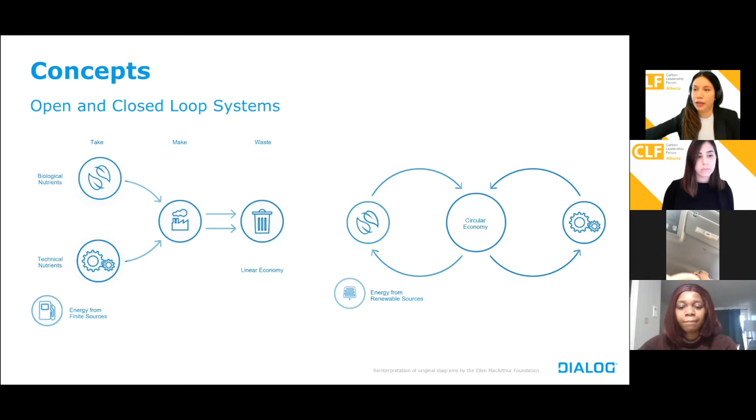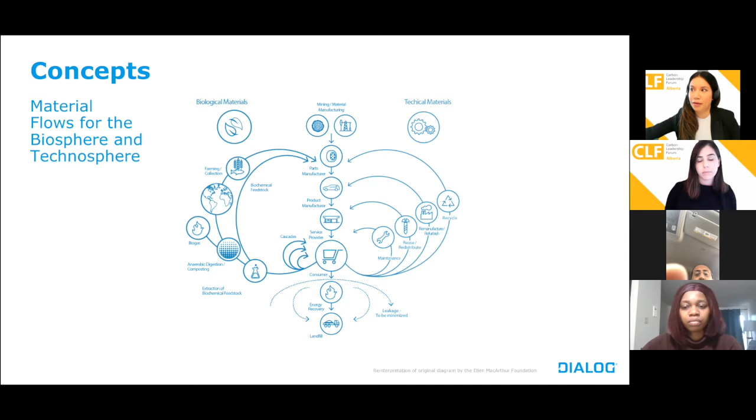This diagram makes a distinction between the biological or natural materials and the technical or man-made materials, and it describes a series of loops and cascades of materials between stakeholders in this resource cycle. Both biological and technical cycles together represent the core elements of a circular economy.

The biological cycle consists of materials that after end of use can be biodegradable without polluting nature, such as cross-laminated timber. The technical cycle consists of materials that after end of use can be separated and reused into new generations of industrial products without loss of quality. An example of this would be structural steel.

Circularity aims to intentionally design systems that separate these two kinds of materials and cycle them into new generations of industrial products without degrading their quality. You'll notice in the diagram that there are shorter and shorter loops. These are meant to describe the concept of upcycling, which aims to shorten the cycles between material reuse. The shorter the cycle, the more energy is retained.

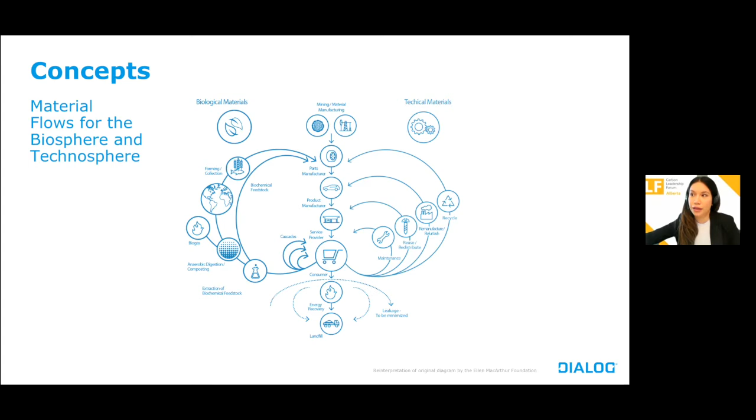Depending on a project typology, the design service life of structural elements can sometimes be only 5 to 10 years. Through circular design, the intent is for the structure to be a minimum 50 to 100 years, thus prioritizing the long-term durability of elements to achieve an extended design service life.

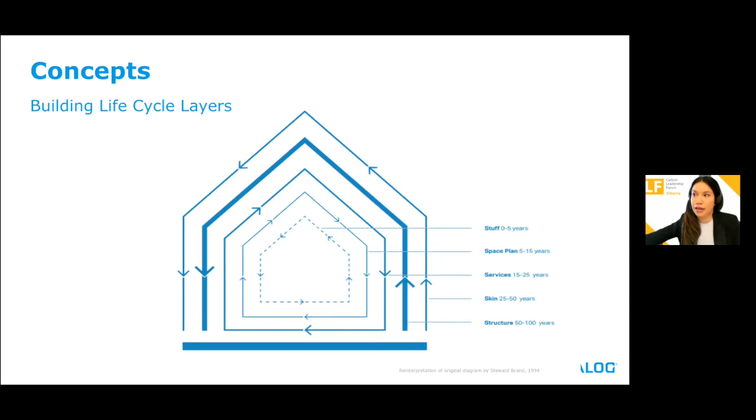Now I will pass it on to Stephanie Dalo.

Thank you. So a strategy that can be implemented to achieve circularity in your projects is designing for disassembly. You can think of it kind of like getting the most bang for your buck. When you design for disassembly, it allows for systematic and selective disassembly at the end of life, making deconstruction more feasible. This in turn can allow for salvaging of materials and therefore diverting construction and demolition waste from waste streams.

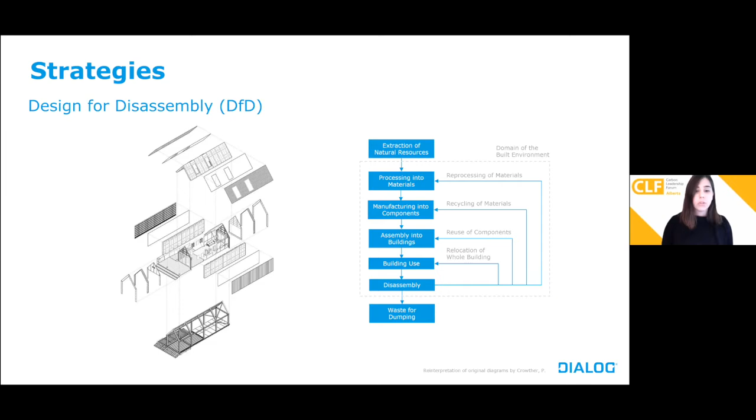This also makes it so that the carbon that was originally emitted through the extraction, processing, and manufacturing phases remains stored in the material or building components that can be reused.

When designing for circularity, it is important to source materials and products that have lower environmental impacts. An environmental product declaration, or EPD, allows the project team to better understand and measure the material's global warming potential and its contribution towards the environmental impact categories. Typically, designers are mainly concerned with ordering products that have EPDs so that they can gain LEED points.

However, EPDs can also offer both architecture firms and the clients a benchmark to define the environmental performance of their portfolio, and these portfolios can go on to be shown to future stakeholders. If EPDs are used more often, it will help provide more transparency in building product markets and elevate the awareness of the environmental impact of products. Stephanie will go into EPDs in more detail later on in the presentation.

Another strategy to consider is material monitoring. Some firms are looking into this concept by defining something called material passports, which aim to connect the physical materials with the digital data. Effective recovery and reuse of components, products, or materials in buildings requires that the right information is easily accessible. Material passports act as sets of data describing defined characteristics of materials in products that give them value for recovery and reuse.

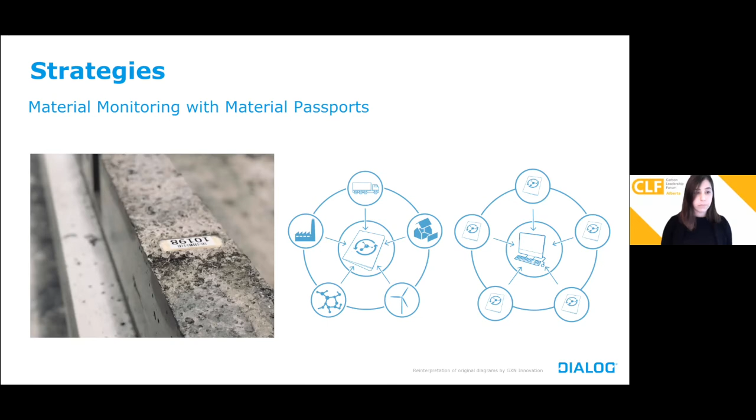There are examples of this kind of technology being used today. Tremco and the Hong Kong Housing Authority have been using RFID chips for better tracking of their products. Tremco is using RFID chips in their roofing to scan to find out product info and if there is an EPD, maintenance, etc. on the roof.

And the Hong Kong Housing Authority is also using RFID chips in their building elements to enable real-time visibility of precast building components that are connected to the BIM and transportation logistics.

On the other hand, as shown on the right there, there's the Superuse Studios Harvest Map, which is an open source platform that tracks leftover industrial and deconstruction materials. The idea is that these materials enter a platform that acts as a material bank. It has been used in the Netherlands and in Italy, and there is a growing interest in North America about this as well.

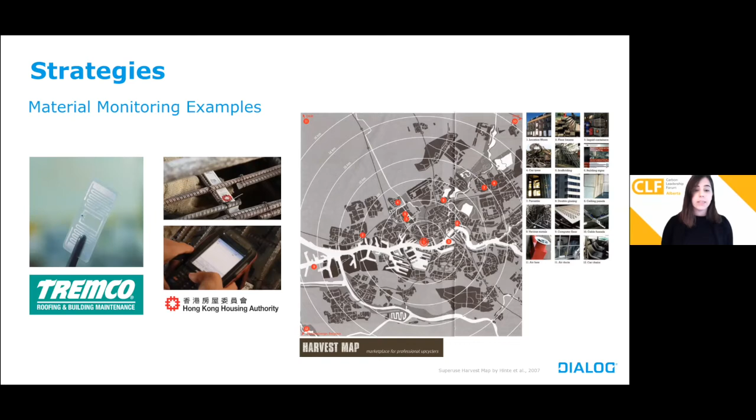We're not going to focus too much on material passports today, but the idea is that this approach can better enable disassembly strategies and the use of EPDs. And the idea also extends past involving disassembly and material screening information to suggest that we can share materials and products across projects. This concept has been referred to as buildings as material banks, since it suggests that buildings can essentially lease materials and trade them between projects.

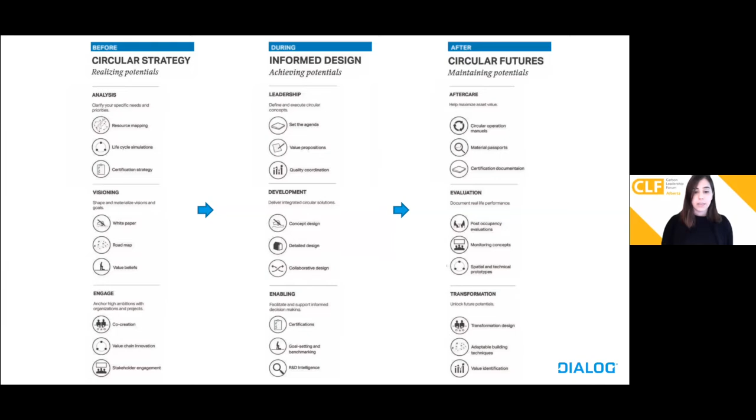And now I'm going to hand it back over to Stephanie Fargas so she can talk to you more about environmental product declarations.

Thanks. So an environmental product declaration, EPD, with a supporting product category rule, a PCR, and life cycle assessment contain information that can be utilized to determine whether a product can be incorporated into the project to reduce the environmental impact categories. EPDs are classified into 2 main categories of industry-wide generic or product-specific, with type 3 being third-party certified with verification.

PCRs are meant to be objective, defining documents that serve as the framework for conducting a life cycle assessment, and that data can be used to inform an environmental product declaration. PCRs can promote fairness by ensuring that all the products of the same type are measured within the same metrics. PCRs are often initiated by an industry request from a manufacturer wanting a product-specific EPD.

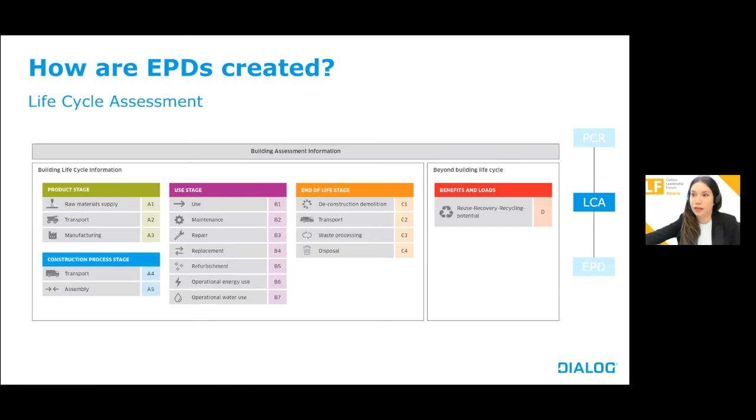LCAs are conducted to determine the environmental impact a product, or a whole building, has on its environment based off of these 6 environmental impact categories. Global warming potential, also referred to as greenhouse gases or embodied carbon, the depletion of the stratospheric ozone layer, acidification of land and water resources, eutrophication, which is a measure of a product's potential contribution to nutrient runoff which can damage aquatic ecosystems, the formation of tropospheric ozone, and depletion of non-renewable energy sources.

If a whole building LCA is conducted, there are various tools in the industry that can be used, such as Athena Impact Estimator, Tally, which is merged with EC3, and One Click LCA. These tools utilize different life cycle inventory data from sources such as Ecoinvent, US Life Cycle Inventory, and GaBi.

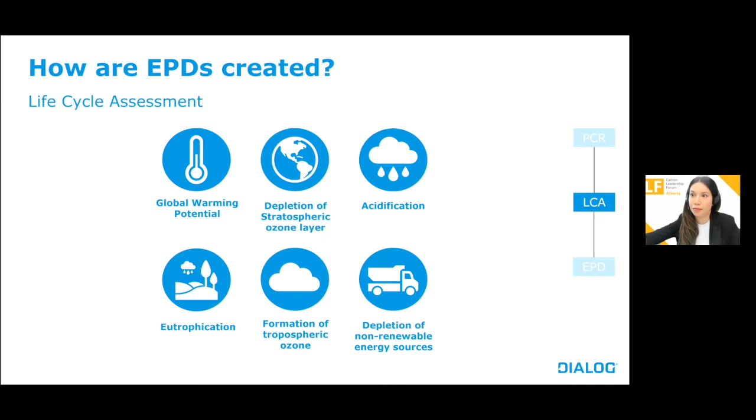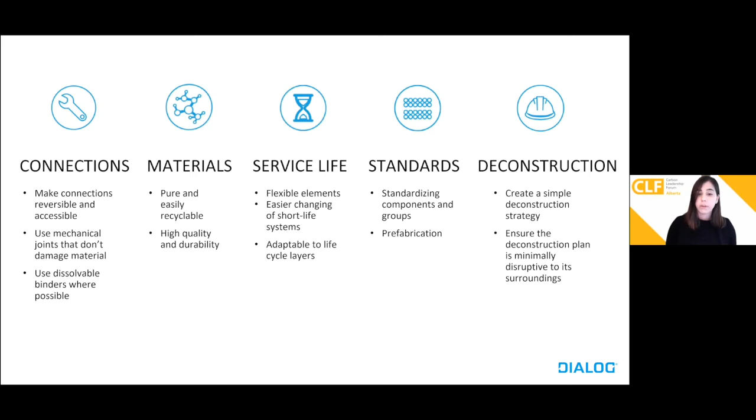5 principles for designing for disassembly include choosing reversible connections that tolerate repeated assembly and disassembly, choosing materials with properties that can ensure they can be reused, designing the building with the whole lifetime of the building in mind, designing a simple building that fits into a larger context system, as well as creating a plan for deconstruction, and also designing the building for deconstruction.

Since the architecture, engineering, and construction industry has gotten a better handle at reducing operational energy, the focus is broadening to reducing embodied carbon. To do this, we are required to complete life cycle assessments, and depending on the client's ask or certification standards we are following, we will be required to meet specific reductions.

Upfront carbon outweighs operational carbon, but if buildings begin to reuse salvaged materials from previous structures, we can significantly reduce the embodied carbon associated with the building's product stage or cradle to gate stage we discussed, which is A1 to A3. Now, the more likely situation will be that we use virgin materials, or maybe that some materials are even recycled.

But if project teams begin to plan for end of life and design for disassembly, this will mean that a cradle to cradle approach is taken, which can be an innovative strategy for reducing embodied carbon of the structure you are designing. So that means accounting for stage D, because when you do that through circular design or design for disassembly, it may result in negative values for impacts, which can reduce the overall impact of the building. By not targeting or accounting for these activities in a life cycle assessment, projects are depriving themselves of the credits for recycling, reuse, or recovery.

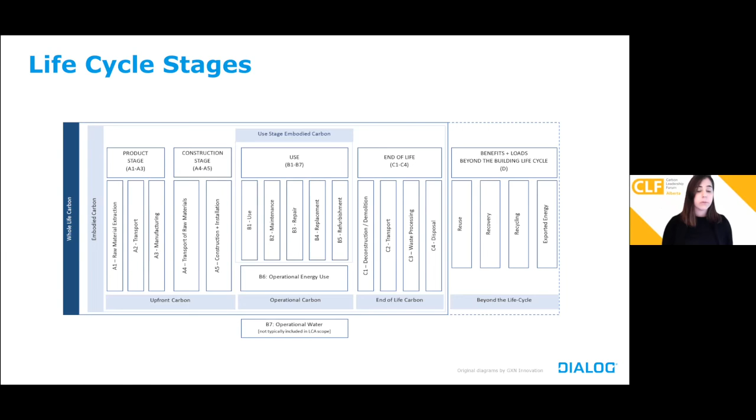Depending on what material or building structure system is being used, there are so many different types of connections that can be considered. To design connections that tolerate repeated assembly and disassembly, we would want to make sure that the connections are reversible and accessible, use mechanical joints that don't damage material, and use dissolvable binders where possible.

Piercing nails through structures and materials to make connections is commonly found in the construction industry. But the unfortunate downside to this is that the nails damage the materials and cannot be retrofitted to other uses. Instead, it is better practice to use screws, nuts, and bolts because it makes the structure easier to disassemble and salvage materials for reuse.

When considering fasteners, they come in all shapes and sizes to allow maximum freedom when assembling things together. But this, however, can become problematic when considering second use of the same material. By using a similar fastener throughout the building construction, there will be less trouble identifying different types of fasteners that are used, and fewer tools would be needed for deconstruction.

Also, it is better to use dissolvable binders rather than glue and sealants when considering the disassembly. Glue and sealants do not consider the next life of the material and leave residues and sometimes tear the material when separating material elements. By using dissolvable binders, the strength of the adhesive is lost when exposed to water, temperature, etc. without agitation.

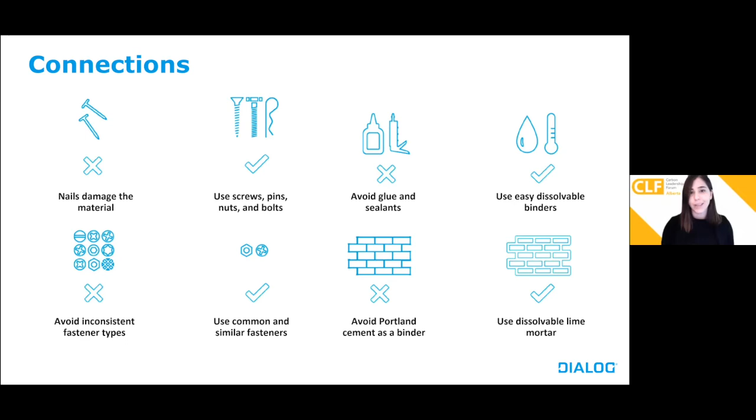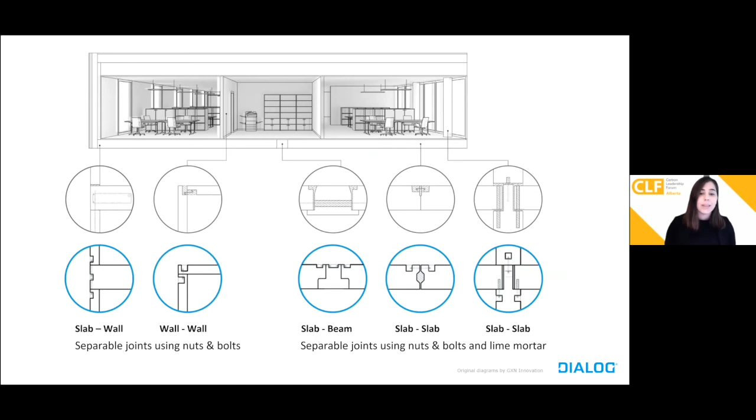Here are the tectonic options for disassembling connections using mechanical fasteners. So here we can see separable joints using nuts and bolts to connect slab to wall and wall to wall, and separable joints using nuts and bolts and lime mortar to connect slabs to beam or slabs to slab.

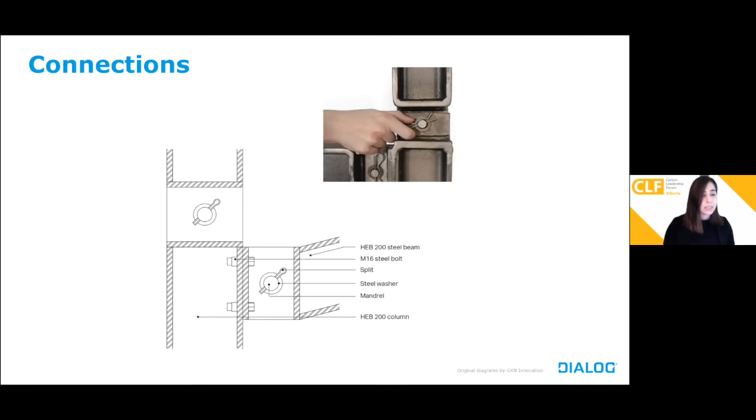Yeah, so I think now we can launch the poll question. Mhm. Okay, great. Yeah, all of you have gotten the question right.

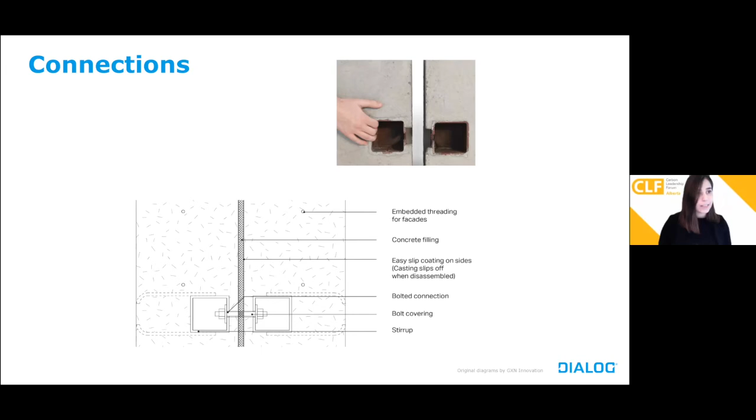Yeah, very good. Okay. This last example of connections is showing dissolvable binding agents used to cast metal stirrups into the panels for attachment rather than welded or cast metal channels. So this is another example of an accessible connection that uses reversible bolt connections. So it seems like you guys understand this part of the principles of design for disassembly.

So when considering materials, we want to choose high quality, durable materials that are pure and easily recyclable. Facade bricks can be assembled in modular chunks where the bricks are connected with lime mortar to allow separation. You can use durable concrete that doesn't require paint for walls and floors to decrease the need for maintenance. You can design windows that can be disassembled since they will need to be changed during the building life. And you can choose solar shading that uses mechanical instead of welded connections.

So it is better to use lime mortar instead of Portland cement because the latter is impossible to disassemble. It will only leave rubble when it's destroyed, as well as the brick will break before the cement. Lime mortar is much more flexible and permeable, and it can be removed by hydroblasting or by beating it with a hammer.

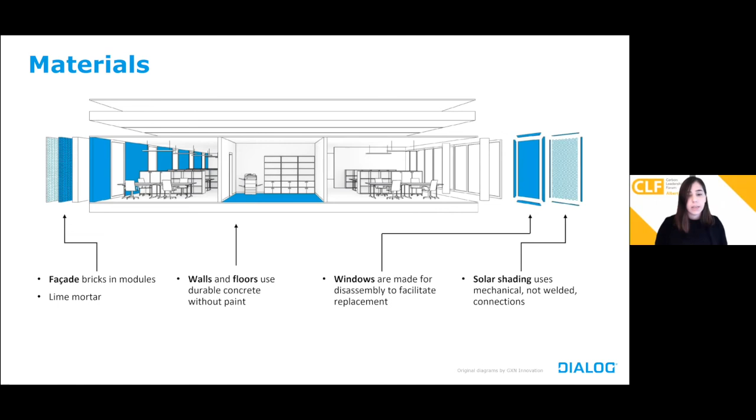With respect to service life, we want to design for flexible elements, or better said, easier changing of short life systems and adaptable life cycle layers. So facade cladding can be attached to the building to allow easy renovation, for example, using unitized curtain walls.

The floor surfaces can be divided into wear zones with areas of high traffic that can be replaced easily and independently. And design partition walls that can be easily moved to allow for interior flexibility, for example, using demountable partitions. And you can install ventilation and cables in the floors to allow for interior flexibility.

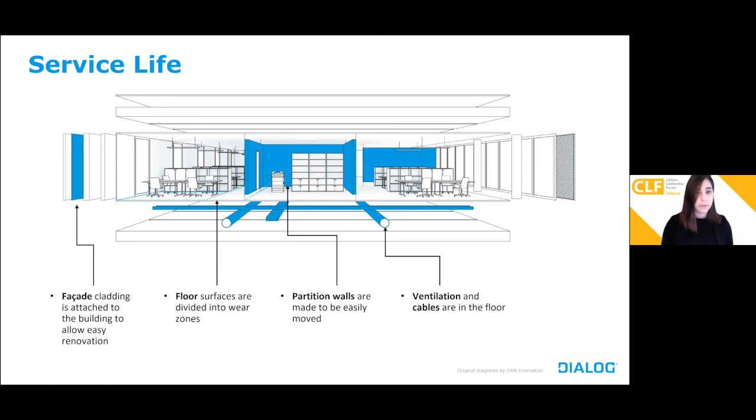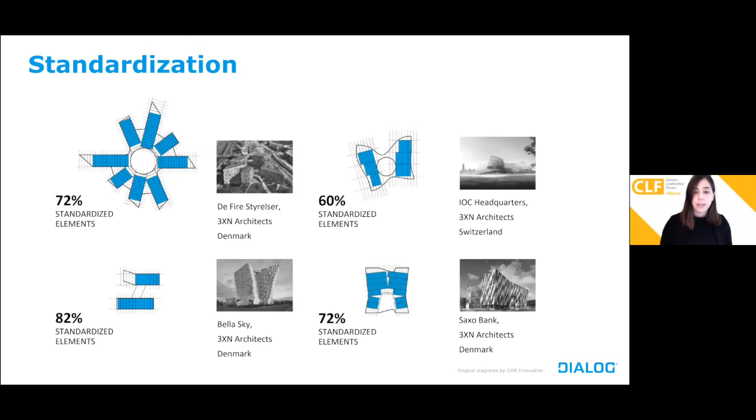And here's a snapshot of 3 projects in Denmark, and one of them is in Switzerland, where the percentage of standardized elements that were used in the design and construction of the buildings are being shown. And you can see there's a high portion of standardized elements. Standardized parts make it easier for contractors to disassemble structures while using efficient and repetitive techniques, and can also allow for easier transportation, storage, and reuse. This approach supports aspects of simplicity, adaptability, and further reuse.

We want to conclude with this example of a people's pavilion that was constructed using only borrowed materials from various partners. This necessitated special care for dimensions and connections, and the attachment strategy required straps to assemble the timber elements to the concrete piles.

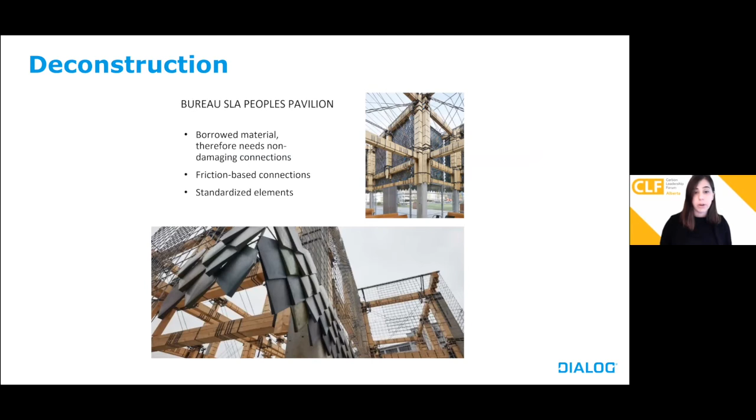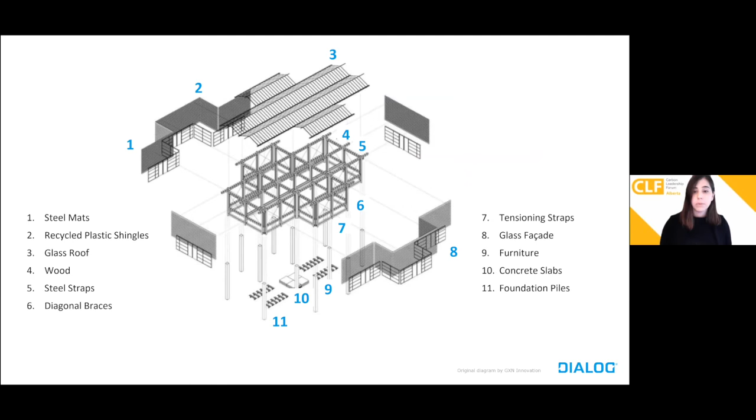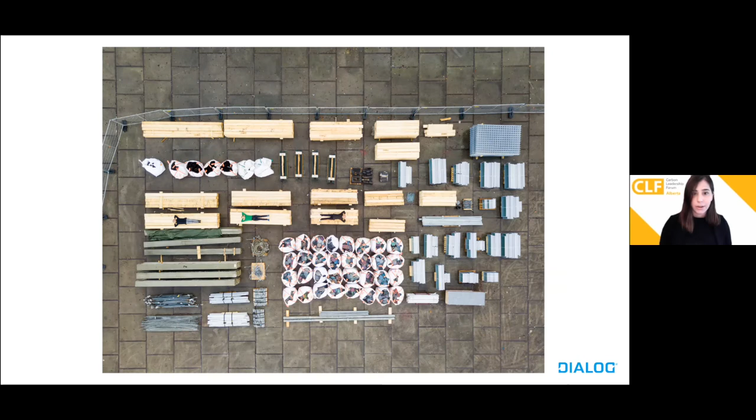Dimensioning the project to material size was done in order to avoid cutting or damaging materials. And the steel mat and simple fastening system was chosen for the facade assembly. This is a snapshot of the complete inventory of materials that were used in the project, and materials returned to the partner. Actually, I have a double of this because I wanted to kind of expand it here so you can see it twice. And then, so this is how it all turned out.

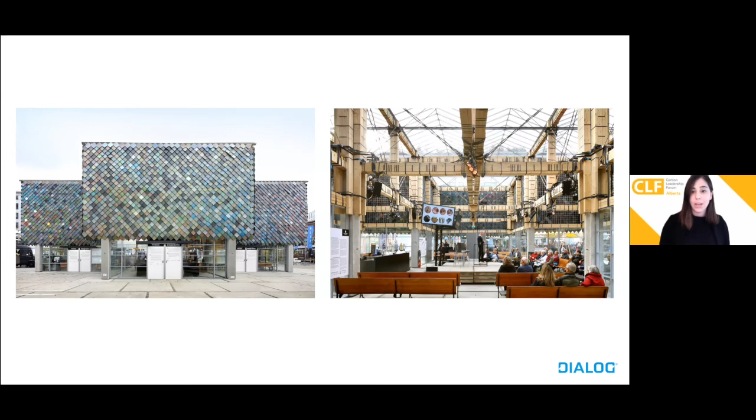This was a 100% circular building where no building materials were lost in construction. The People's Pavilion was actually designed as part of the Dutch Design Week, and it won the Frame Awards in the category Sustainable Design, Habitat category, and the ARC 18 Innovation Award.

So 100% of the materials, the concrete and wooden beams, the lighting, the facade elements, glass roof, recycled plastic, cladding, and even the pavilion's glass roof were all returned completely unharmed to the owners following the Dutch Design Week. Only the cladding that you see, the tiles, were actually given to the attendees at the end, which is pretty nice.

So thank you for attending, and we'll take any questions now. Just quickly, did you want me to launch that last poll? There was one more question. Yeah, one more. Thank you. Yeah, brownie points. Great. Okay, I'll call it. Yeah, it's good.